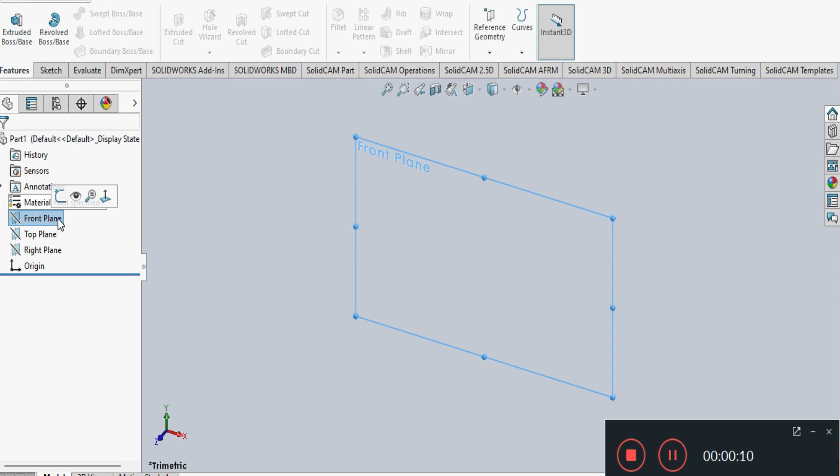In this video, I'm going to teach you how to design an elbow using SolidWorks. So first of all, create a front plane, go to sketch, and you can make a 20 millimeter circle. Give dimension using smart dimension.

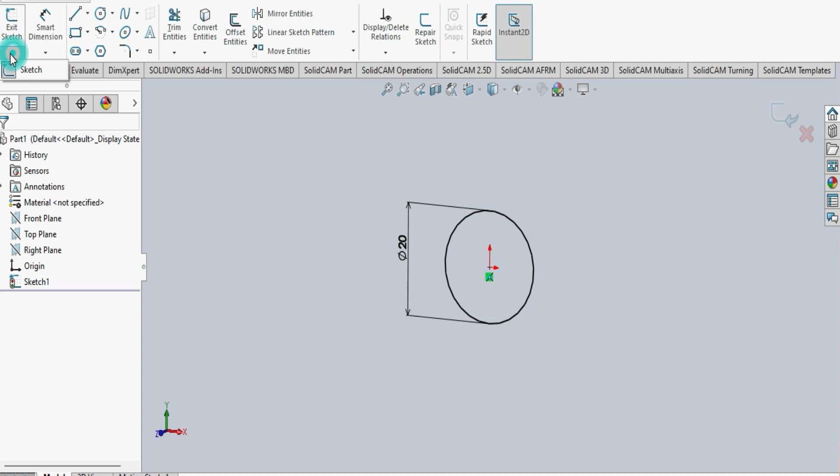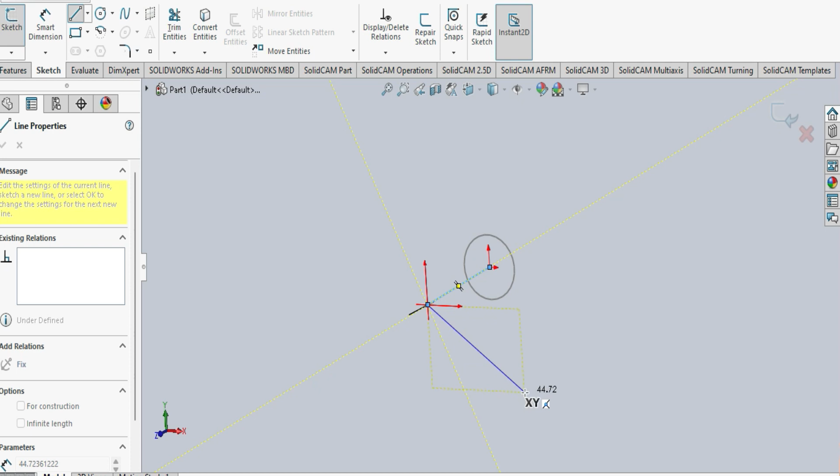Now exit from this sketch and go to sketch, go to 3D sketch. You can make a line like this, and another line, and exit from the sketch.

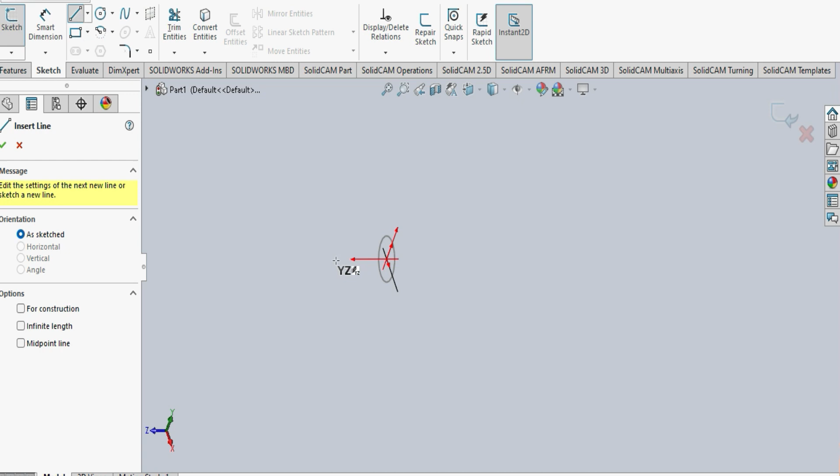Now create a line on this Z direction. Now you can see that this is a 3D sketch, and we can extrude this 3D sketch using this circular sketch, and

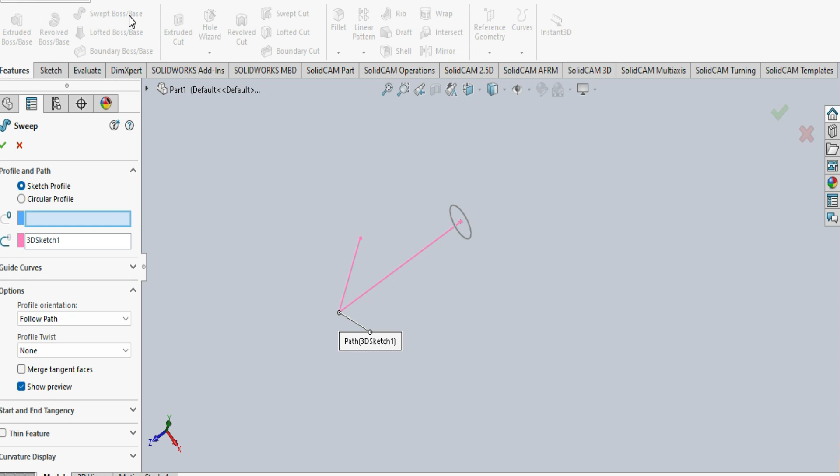to make a 3D model you have to exit from the sketch and go to swept boss base. Sketch profile is this one, and this is the path, and you can see that it takes it automatically. Before that, you have to go to this sketch again and make a sketch fillet on this corner of about 10 millimeters.

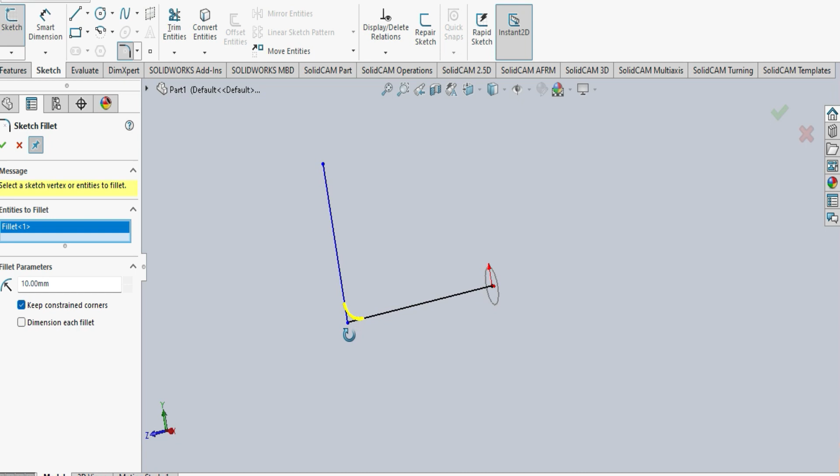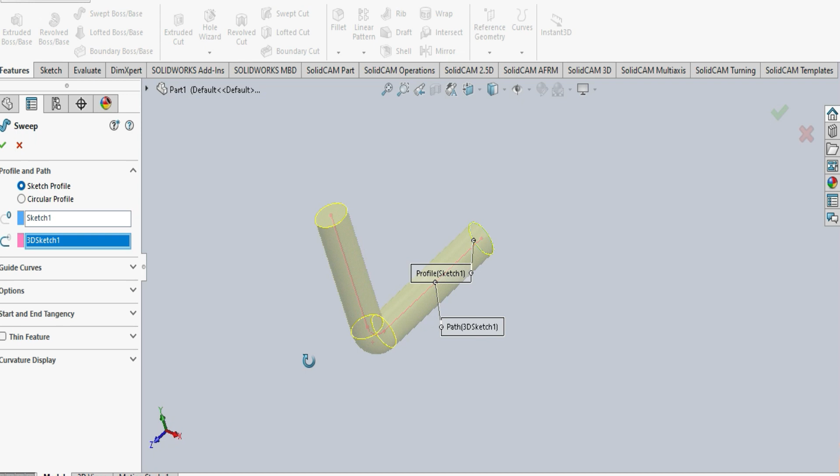Again exit from the sketch and go to features. On the feature tab you can see swept boss base. Select this one. The path is this. Now you can create the 3D model. This is our elbow.

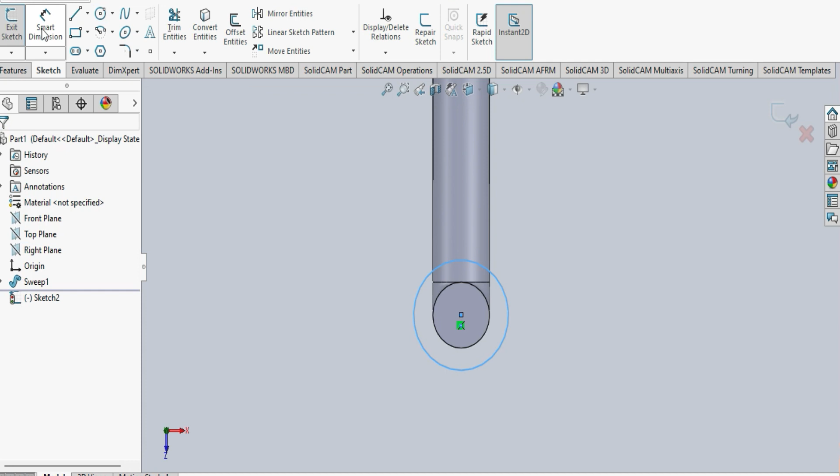Again select sketch, and you can make a sketch of about 35 millimeters and extrude that one up to 5 millimeters.

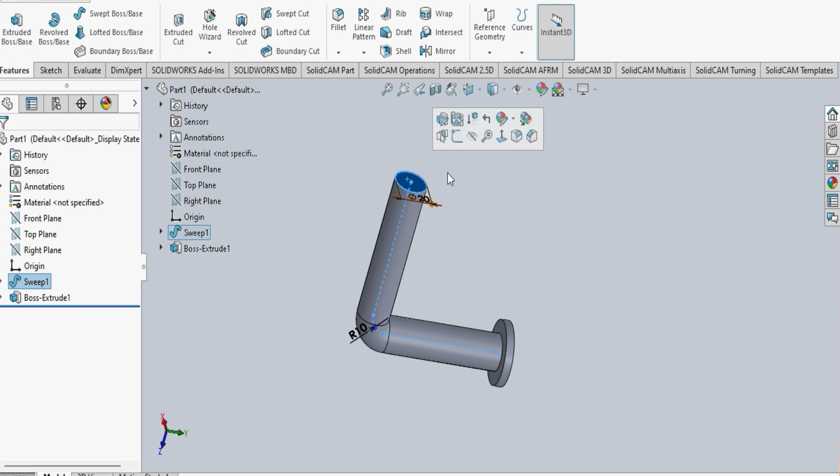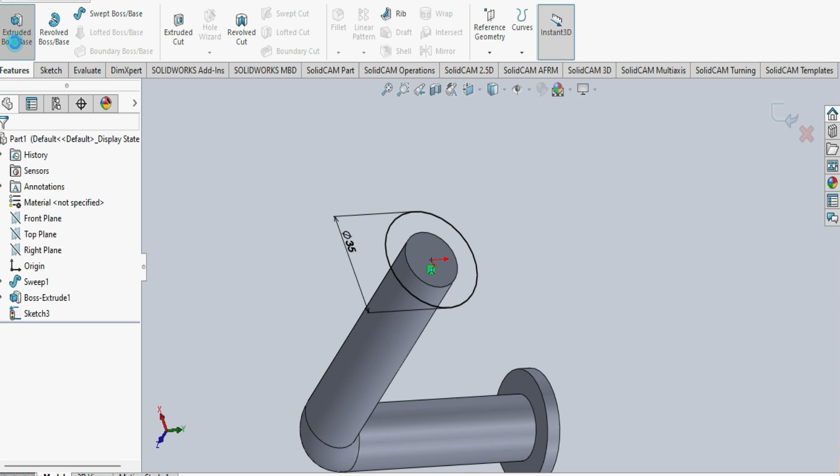Go to convert entities. No, you have to make a circle. This is our elbow.